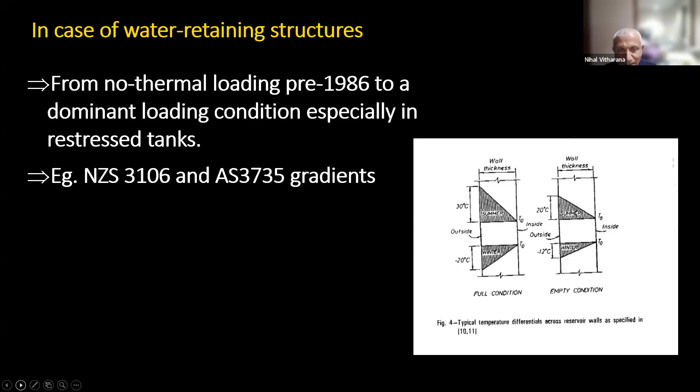Don't think water retaining structures is innovation and guys didn't have anything else to do in their life, so they put these two gradients.

If you look at the bridge, this is a paper I presented somewhere in Japan, in Sapporo in 1995. If you look at a concrete bridge standard, pre-1969 is uniform, so if it's a simply supported multi-span bridge on elastomeric bearings, it will expand and contract, so no bending moment or axial force develops. Now what we got is a fifth order parabola.

If we apply this gradient to the pre-stressed concrete bridge design, this will dominate the live load and the dead loads. That's what it is, becomes very critical. You look at the temperature loads very carefully, this is going to be dominant more than the dead and the live load.

I don't know whether Sri Lankan standards or British have anything, and European standards have this. This is introduced by the New Zealand Ministry of Works. As a graduate, I took measurements on the temperature gradient. Probably I got paid about $1 an hour, which is worse than what a slave would get those days.

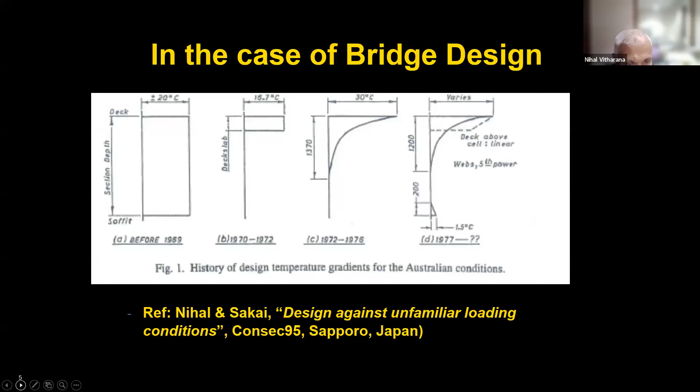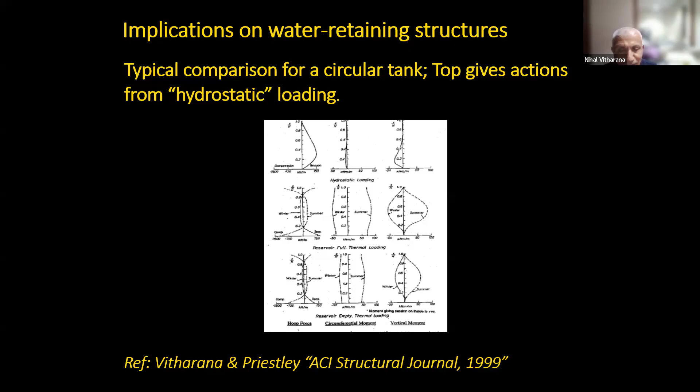This is what most engineers forget or haven't understood, including the professors. Thermal loading is a serviceability loading only. It doesn't apply to ultimate limit states unless there are secondary effects like buckling. It's normally very difficult to buckle a bridge or water tank.

Code implicitly states that too, but there are engineers who apply this to ultimate limit state and end up with reinforcement cages so congested even a bumblebee can't go through. That gives a lot of problems with concrete because you end up with honeycomb concrete. It is because they don't follow these basic principles properly.

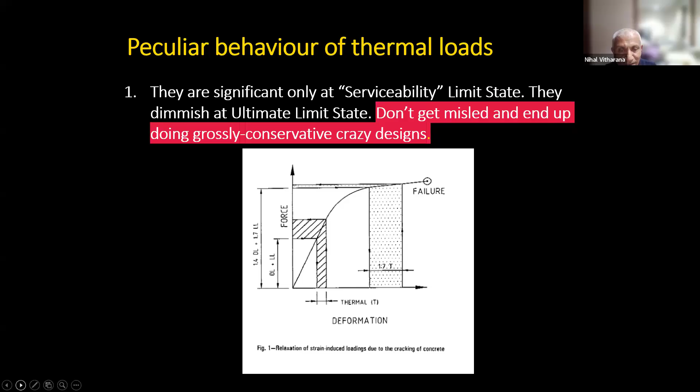As I said, those linear gradients are easy to apply to any design because we break that into uniform, average, and differential, and there are charts available to determine the bending moment and the axial forces. But when the members become thicker, more than 200mm, the temperature gradient is extremely nonlinear, meaning the design effort needed is a little bit more complex.

We had to determine, I will show you later, primary stresses - that is, if the member is unrestrained, what are the stresses developing, because it violates the plane section remain plane hypothesis.

This is typical temperature distribution in a hydrating wall, not solar radiation. We get higher temperature in the middle and lower on the sides because formwork, normally steel, is more conductive than wood formwork. So the bottom two we have broken into primary and secondary stresses. The one on our left, when we look at it, are the primary stress, unrestrained, so we get primary stresses. They are self-equilibrating, and then if it's fully restrained, we get the shape on the right side.

So that's what I said, we had to be very careful when dealing with nonlinear temperature gradients.

I just put this in one of the papers, I can send it, Bandhu can get it. These are simple equations on a beam type member under both external and internal restraints. If RF is external restraint and RM is restraint against bending moment, if we put RM and RF at 0, it gives primary stresses. If we put RM and RF equal to 1, you get the fully restrained conditions.

Once we separate out the primary stresses, linear gradients, there are charts available which designers can use. New Zealand 3106 has charts for circular tanks, and one of my early works got charts for rectangular tanks with sun on any of the four sides. So life is much easier when temperature gradients are linear.

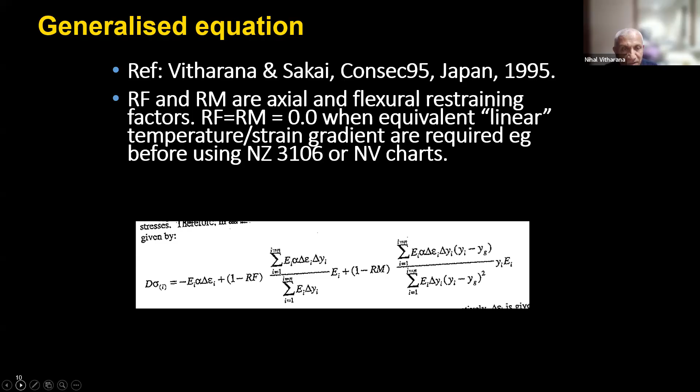Sorry, I had to rush through it, it's a little bit complicated subject, but I'm just trying to give you an insight into what is there.

As I said earlier, this is how a nonlinear temperature distribution on the left has been broken down into uniform, average, differential, and primary. The first two, uniform and differential, are very easy to deal with. There are charts for water retaining design engineers.

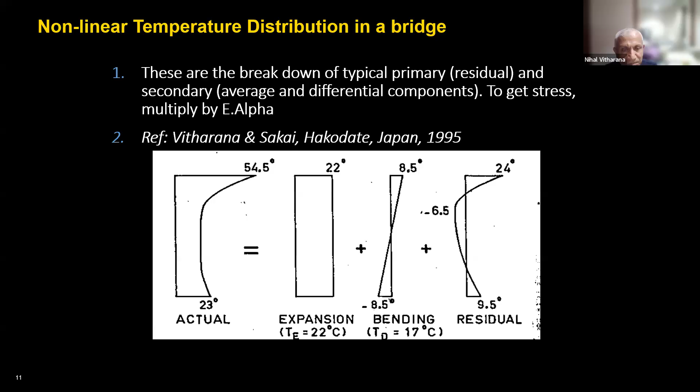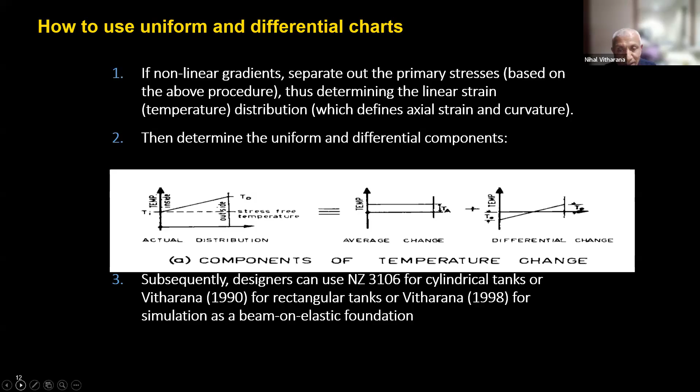So like what you saw earlier on the New Zealand temperature gradients, we got a 0 to 30, so we broke it down to 15 uniform and 15 differential. Those two can be easily used in any of the charts available. Uniform, as I said, if you've got a rectangular tank with uniform temperature drop, you get very high axial forces.

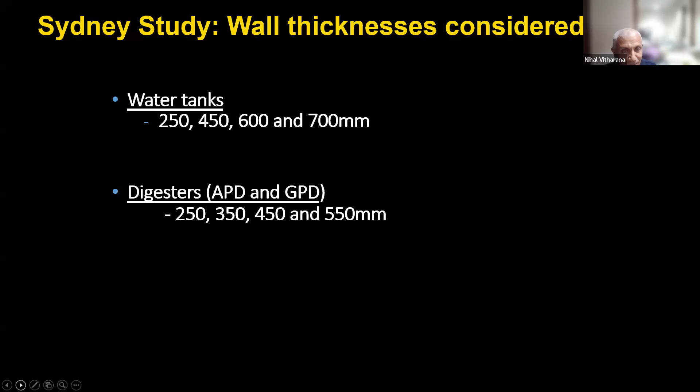As I said, temperature gradients were first introduced by a person called Ackerman in South Africa. He found a lot of tanks crack, and then found out that it is due to temperature changes in South Africa. He published a paper in the Institute of Civil Engineers in 1960.

Then Wood, who was the head of structures at Ministry of Works, New Zealand, measured temperature development in a pre-stressed wall in Wellington, 178 millimeters thick. Those are the measured gradients.

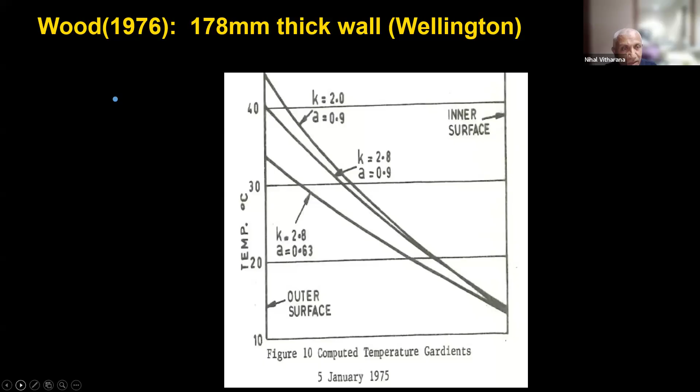New Zealand was lucky because the New Zealand government put a lot of money into research in those days. I was lucky too - I was there from 85 to 1995, all funded by the New Zealand government when it comes to concrete and earthquakes.

Then in 1977, again in New Zealand, late Professor Priestley measured and calculated things on a 200 millimeter thick wall. Nigel was my PhD supervisor at Canterbury. So you can see even with 200 millimeters, there is a nonlinearity.

The code writers didn't want to make engineers run away from the standards when they look at nonlinear gradients and don't know how to design it, so we simplified it by linearizing. But if they apply that to thicker members, design becomes very uneconomical.

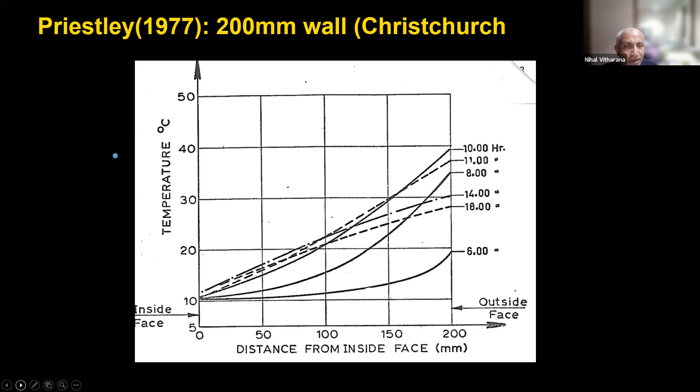As I said, similar thing. I didn't want to make things complicated. When it comes to strain-induced loading, they are deformation dependent, modulus EI - E is Young's modulus, I is the inertia. Similarly, if you take something like an expanding steel bar, if you restrain it, the induced force is proportional to A, the axial area, and E.

So cracking of reinforced concrete relaxes the induced forces - that's what we call the strength stiffness reduction factor, RF, in the standards, and it only goes up to 250. Gradients like those are used cursorily by engineers for just about anything - at 600, they use that and come up with tons of steel, and contractors nearly go bankrupt. Even if they don't go bankrupt, congested steel causes honeycombing, and they probably will go bankrupt again.

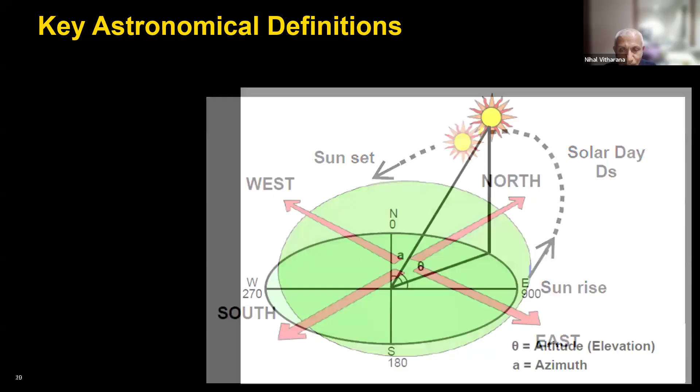This is the definition. The sun is there, and when you project it to a horizontal plane from the northern bearing, you get azimuth, which is A, and elevation is theta. These can be calculated for a given day based on equations. Normally what's called Ds is the solar day, which is the time difference between sunset and sunrise. Each hour, the sun moves by 15 degrees - that's how it works. So if you know the solar day, you can calculate the solar angle by dividing by 15.

Yeah, next one, please.

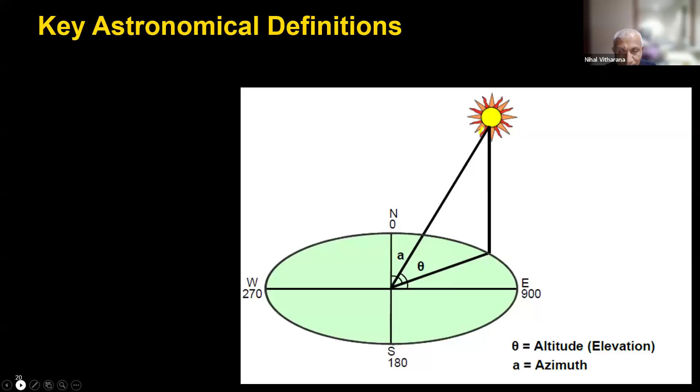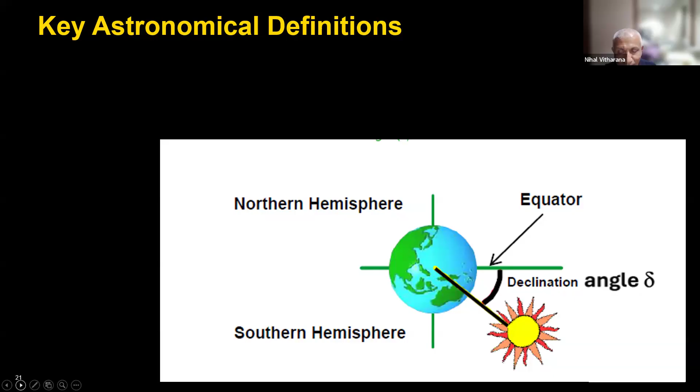This is basically what happens, why we get summer and winter - for some reason, don't ask me why, the Earth doesn't rotate in line with the center line between the sun and the Earth. It has an angle called declination, and it changes throughout the year. So as the Earth orbits around the sun, it is at a varying, awkward declination angle, which can be determined given the day - there's a formula for that. As I said, total global solar radiation Q, normally in megajoules per meter squared, is the key parameter needed to run this model.

It's called cumulative, and I'll show you there's a formula to calculate it on an hourly basis. So it's on a horizontal surface, but if we hold a paper perpendicular to sun rays, that's called direct beam radiation. On a vertical surface, solar radiation is much different from horizontal, because the vertical itself is at an angle. So direct beam has two resolutions: first we go from the horizontal beam to the vertical direct beam, and then convert it back to the bearing of the wall.

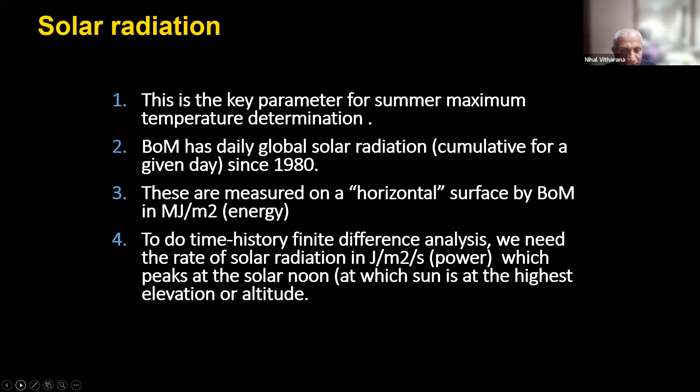Now we don't have any problem - I can just hit the button and get any previous day's total global solar radiation. That's the equation; it gives joules per meter squared per second on a horizontal surface. Q is the total global radiation in a day, and DS is the solar day. You can calculate that mathematically from formulas. Yeah, next one, please.

Now, again, a little bit of astronomy. When we get solar radiation on a horizontal surface, it has two components. One is direct beam, and when the sun emits its energy and it enters Earth's atmosphere, it also gets scattered, known as diffuse. It's like having lights over half of the Earth, the hemisphere, and all that hemisphere puts solar radiation on the horizontal point. But on a wall, we only get half of that, because it's a quarter of the Earth. So we first determine the radiation intensity on horizontal, then determine what's the direct component and what is the diffuse or scattered component.

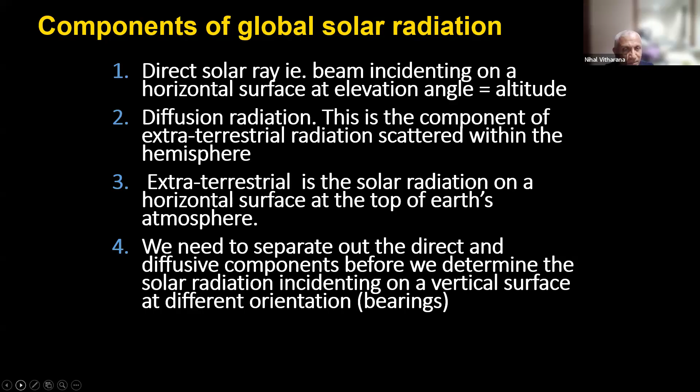And again, it is going to solar energy. I think some Australian scientists who work at CSIRO developed a methodology to separate those things out mathematically. Spencer is an Australian scientist at CSIRO who used his method and then compared it with another person's method. You can't get 100% accuracy, but the solar energy estimate science has the least precision, so you should not try to get the number to the third decimal place.

One other thing with the vertical wall is we get reflection back from the surrounding. If it's a clear surrounding with a lot of white buildings, in New Zealand, when they measured at Christchurch airport on vertical panels, they found 40% coming back from the nearby surrounding structures. So what you measured on a horizontal surface can go up by about 40% on a vertical wall because of the reflection back from the surrounding.

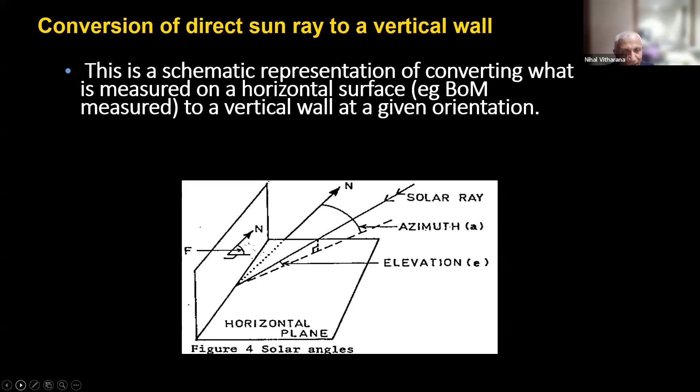This is about how you handle a vertical wall at an angle to the north, with the sun azimuth and the altitude. It's not complicated mathematics, but you just need to resolve the direct beam and diffusion at different angles.

In a simplified case, that's the equation given for one on a vertical wall, once we know the value on the horizontal surface, IHT, because it has the bearings and the azimuth involved.

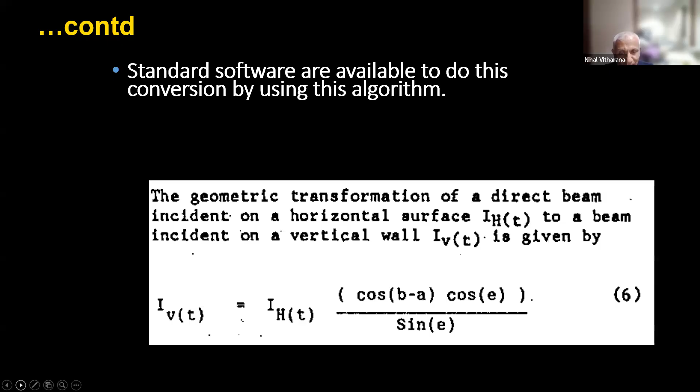I'm just giving insight so that you know what's involved - this is all part of that method. Then I applied it for the maximum daily value. We had data on the daily total since 1980, so it's nearly 45 years of data. Out of that, on the 3rd of January 2000, we had the highest solar radiation recorded in Sydney - 35 megajoules per meter squared, the maximum ever recorded since 1980.

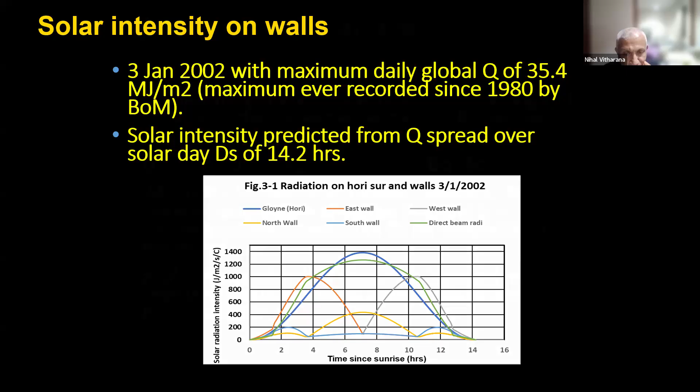One other input parameter we need is ambient temperature. Now this is tricky - I don't know what is reported in Sri Lanka by the Department of Meteorology. Here, they give Tmax, the maximum ambient temperature in a given day, and the T minimum. So for the hourly variation, we had to develop a curve. There are a few models, and that's what I have done here. We get Tmax and Tmin given in the standards, and then convert them to hourly values, because we need ambient temperature for the convection calculation.

If ambient temperature is lower than the surface temperature of the concrete, heat will be lost to the surrounding due to convection. If it's a windy day, more heat will be lost. So that's what we need - that Ta,t value in that equation.

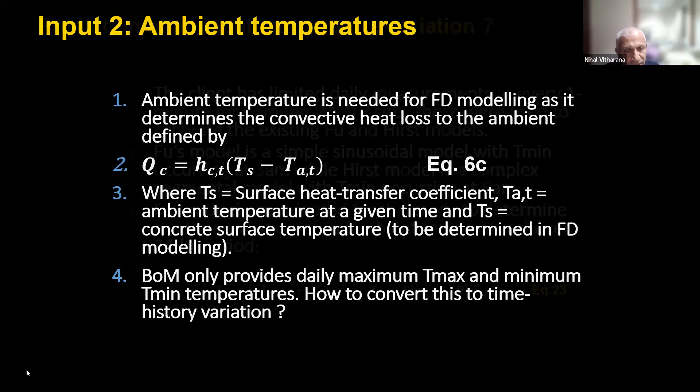There are two models normally used by engineers for bridge temperature calculations. Fu is, I think, from Hong Kong. Hirst is a professor who used to work at Adelaide University in South Australia. They both give very similar curves, but Fu's one is better because it's a simple formula - only two parameters needed, Tmax and Tmin. The assumption made is that the minimum mean lowest temperature occurs at 3 a.m. and the highest at 3 p.m., with a sudden drop of 2 degrees at sunset.

This is a comparison with measured ambient temperature from 4th January 2020, where the measured temperature was 45 degrees. The T minimum on that day was quite unusual, minus 3.3. The maximum was measured on 4th of January 2020 at 45 degrees, and the winter T minimum occurred on the 16th of July 2018. You can see the two models versus measured values are reasonably good, though not perfectly accurate - you can't get full accuracy on these because, as I said, this is not a precise science.

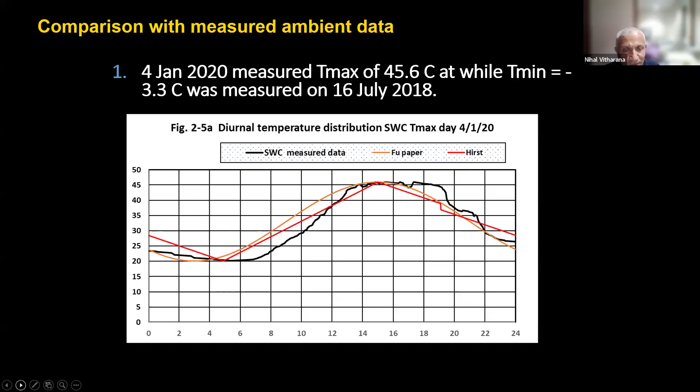Now the other thing we need to do is determine the inside temperature of the water or the sludge. It's very difficult to do mathematical predictions because operational water comes and goes depending on demand. Similar with sludge, it's exposed to atmosphere before being fed into the digester, then after phase 1 digester it goes to phase 2. So the best thing is to have some sort of calibration of inside temperature with a parameter.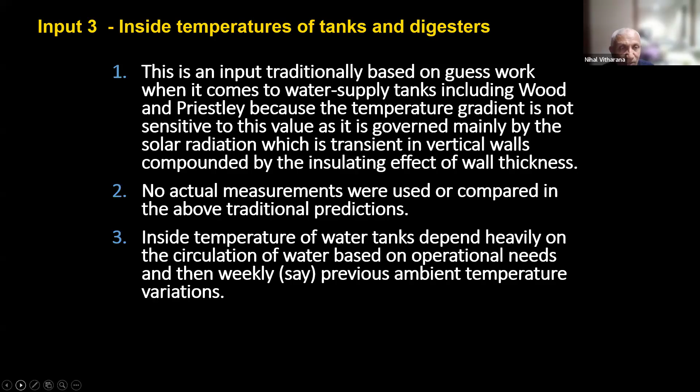Best parameter is the ambient, because water is coming from a dam or pipeline. Previously, like in New Zealand, they assumed inside temperature is always equal to the 6 a.m. temperature of that day. It doesn't show to be correct when we look at the data from the client's portfolio, but again it doesn't make much difference. So what I've tried is calibrating with the average temperature of the previous 6 days as the initial temperature for the tank.

Next one, please. Again, this is a correlation between the inside temperature and the mathematical formulation we regress from the measured data.

Wind speed, as I said, is very important because we lose heat due to convection. At zero wind speed, the heat transfer coefficient HC is about 10, but it's very sensitive and can go up to about 80. So if it's windy, our temperature would be much lower because we lose heat from the wall to the surroundings.

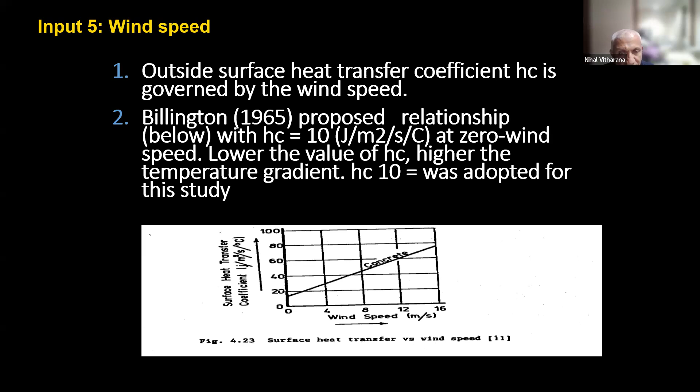Thermal properties: thermal conductivity of saturated concrete is about 1.4 joules per meter per second per degree C, but it can increase to about 2.2 for hydrating cement like wet concrete. The specific heat doesn't change much, it varies from 900 to 1000.

The surface absorptivity factor is very important. On a black surface, like concrete, it's 0.9. So if S is the incident solar radiation from the sun, 90% will be absorbed. Whereas a white surface absorbs only 35%, the other 65% is reflected back to the surroundings.

Finite difference model: so we got inside temperature, solar radiation, ambient, then we can do a finite difference. I am prejudiced towards finite difference, but there are finite element models as well.

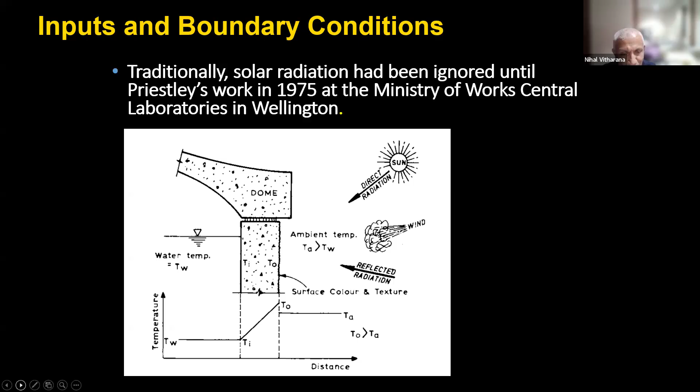As I said, you saw this diagram earlier, so we are going to mathematically model it. So for the system, on our right we got all the incident solar radiation, things go out as QC, and the water remains at almost constant temperature.

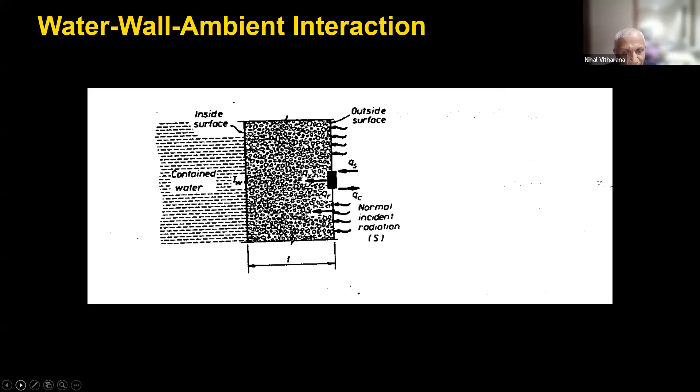This is the second law of heat transfer, similar for groundwater, similar for diffusion of moisture. We need to mathematically model it, in my case using finite differences. On your right we got density and specific heat C. If specific heat C is 0, because to raise the temperature of material we don't need much heat, that curve becomes linear.

So when it becomes linear, it's known as steady state. That's what they sometimes only teach students, steady state. So if you go T1 to external T2, they draw it with a line. But it's not the case when you go to unsteady state.

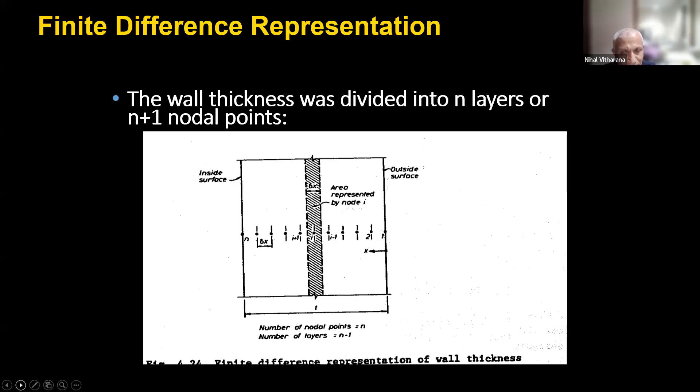So this is a finite difference discretization, n plus 1 nodal points and n layers. I'm just going through this one very quickly. These show how you do mathematical balance in a finite difference, and some of the papers I wrote in 1990 got this formula.

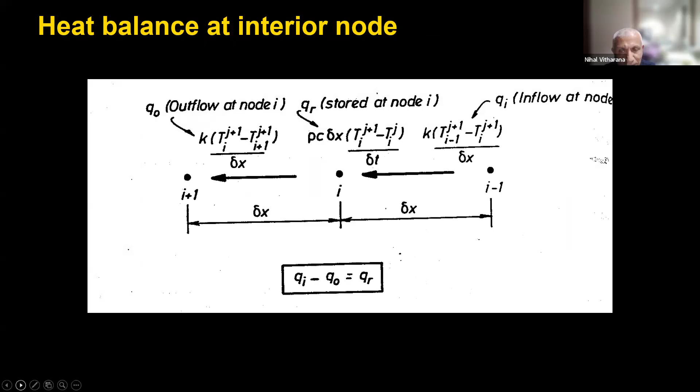So for this interior node, that's the equation, how it looks like. And for the external surface, this is how it looks like.

There are two methods in finite difference. One is implicit, which is moving forward, so we have to have an n by n matrix to be solved. But there's explicit, which is backward substitution, so you can do it on a spreadsheet or by hand calcs without any iterations, but you have to select a small time step, otherwise it becomes numerically unstable.

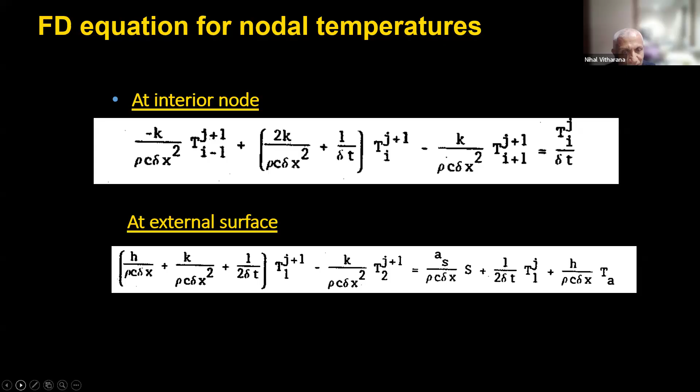I use implicit because I have a program written a while ago, but if I'm lazy I do it on an Excel spreadsheet using the explicit scheme. I write those formulas for external and internal nodes, and I get this matrix. I use a direct inversion method, but some people don't like stalling the computer. Nowadays computers are so powerful, a 50 by 50 matrix is solved in probably less than half a second.

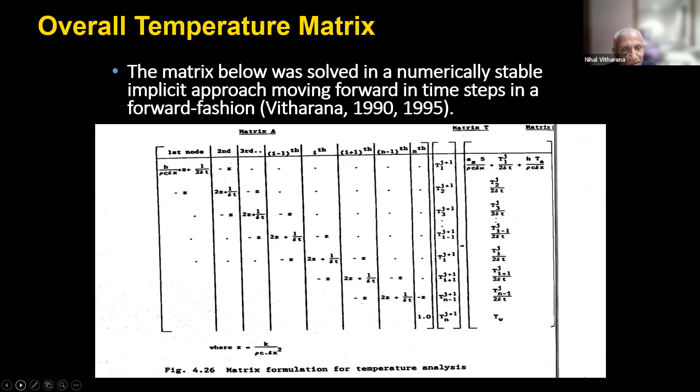This model we calibrated using real prototype concrete slabs, heated from one side with a circulating water cooling jacket on the other side, and tested for bending moments and axial forces. These were published by myself and Nigel Priestley in 1998 and 1999 in the American Concrete Institute Structural Journal.

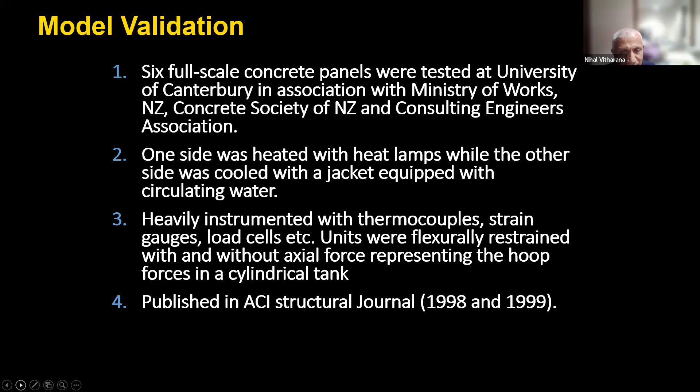So this is a schematic representation of the cooling jacket. You've got heat lamps, infrared, on one side and the cooling jacket on the other. When we measure temperature gradients as well as restraint forces, we need to restrain them to calculate the bending moment and axial forces they induce.

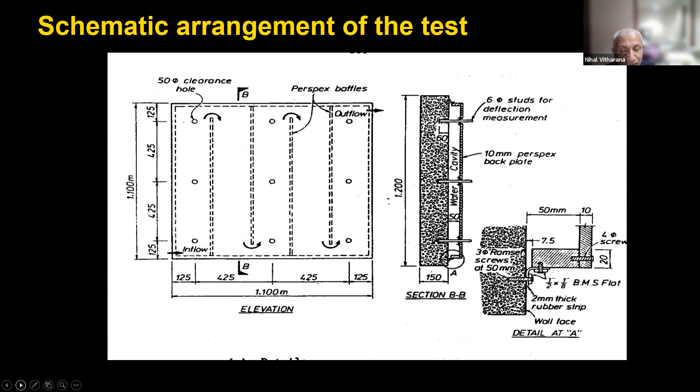These instrumented slabs were at the University of Canterbury. I and the technician did all the manufacturing, day and night.

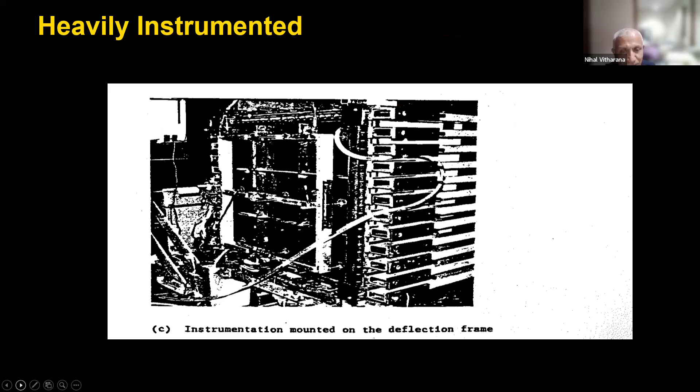This is measured as well as finite difference program data. See how it's reasonable matching. But if we massage the numbers, we can get 100% accuracy, but that's not the purpose.

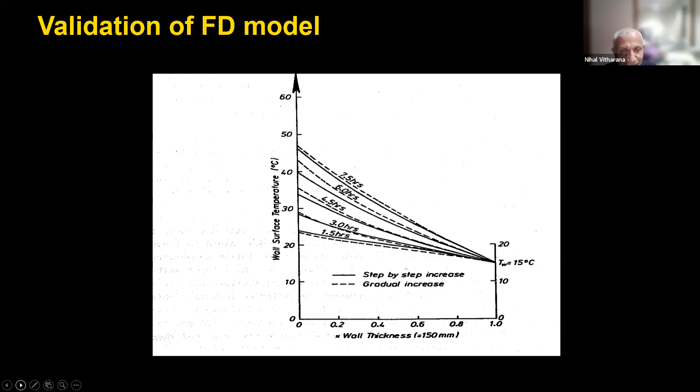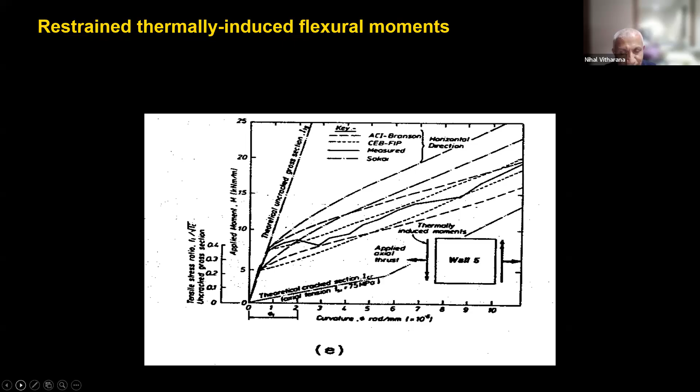Now, all this is good. So for Sydney, we did a lot of calculations over a few days and various tanks, various conditions to come up with nonlinear gradients. I will present those ones very quickly.

So 3 scenarios were considered: the day with maximum recorded global radiation Q, maximum ambient temperature day, and minimum ambient temperature day, for 45 years of records. We didn't want to do probability, we just want to get the maximum and make sure the things are a little bit conservative.

So summary of the finite difference analysis: critical maximum and minimum temperature gradients.

Water tank and acid phase digester 2 have similar temperature gradients. Acid phase digester 1 is the first one, it's the stabilized thing, so temperatures are not as close to the ambient, exposed previously. So we're only giving the water tank ones.

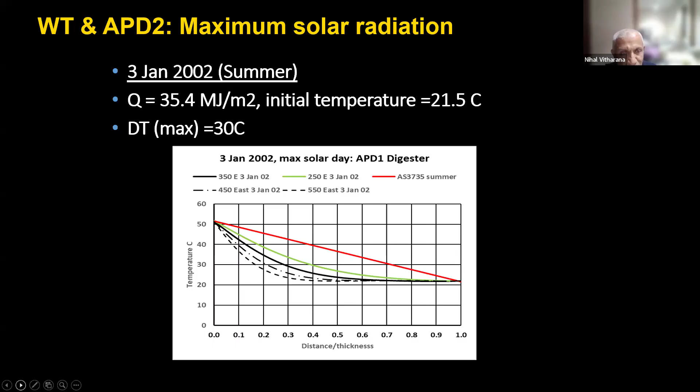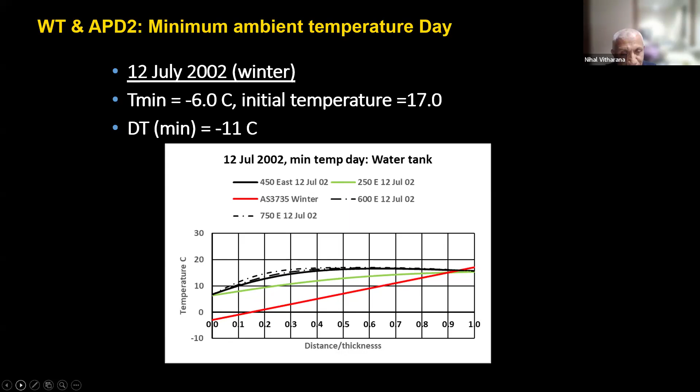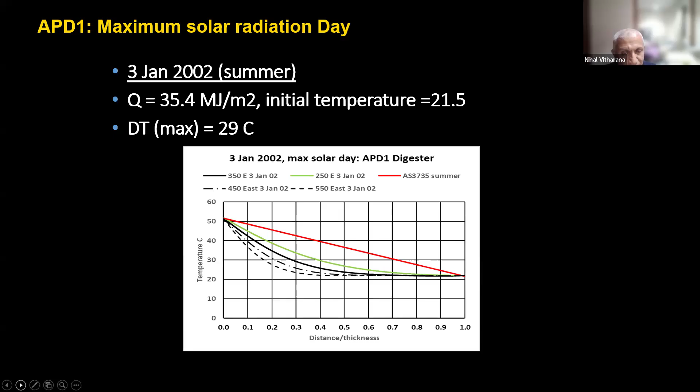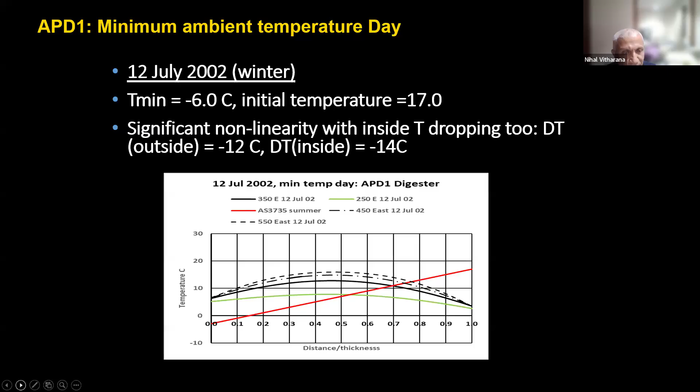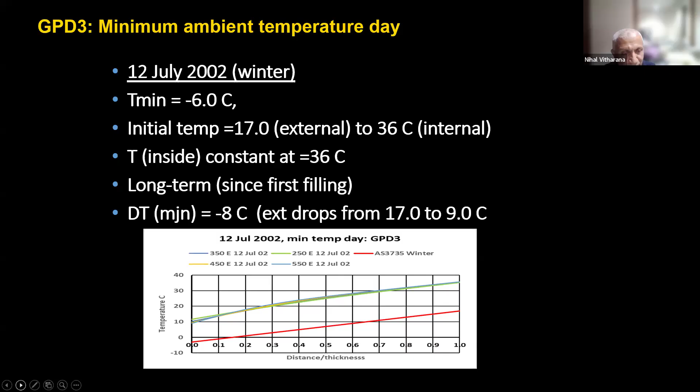So the maximum ambient temperature is a similar day. This is a winter case: again, a different curve, inside remains at 36, while the outside drops to, I think that day outside temperature is -4.

-6 that day. So I just want to say east facing versus west: in the morning east facing won't get the solar radiation, but the ambient temperature is lower early in the morning. When it goes to the west, probably the same solar radiation, but we get higher ambient because it has heated up. But still the difference is about 4 degrees, sometimes not worth worrying about when we know all the uncertainties involved.

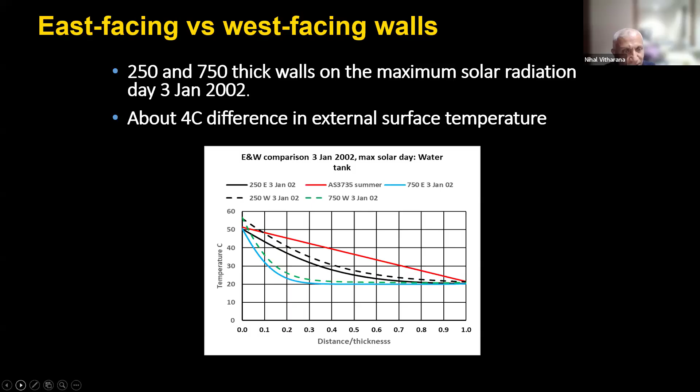All that is good, but every engineer can't sit and... sorry, there was some crash, give me one, please. Okay, you may have to reboot. Be on time.

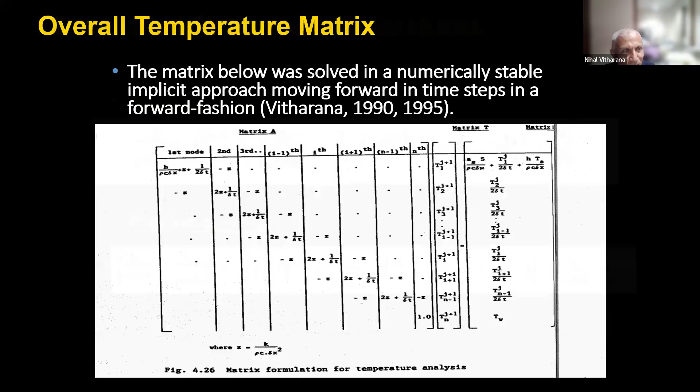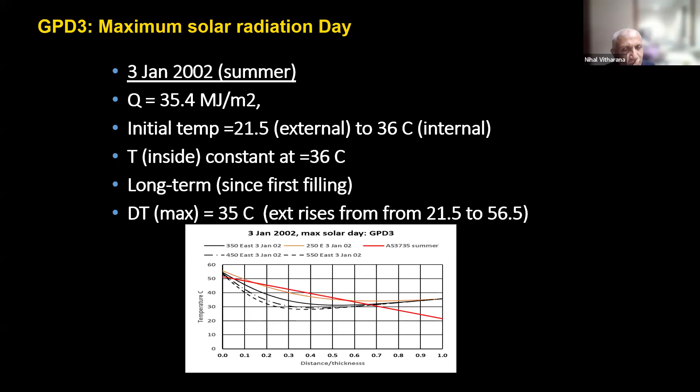As I said, not every engineer can do finite difference. I get young guys who can't differentiate sine theta, looking at my face, wondering how to do it, needing to go find Google.

So for that reason, we try to develop a nonlinear model, at least for the summer, because it's very difficult otherwise - it's position dependent, day dependent, operational dependent. But at least for summer, which is the critical one for tank design, this gives a nonlinear gradient which covers all the wall thicknesses. With that, the tendency would be design won't be that conservative, but it is almost similar to linear when it is about 175 millimeters, but it becomes nonlinear for higher thicknesses. So with higher thicknesses, it will provide economy in the design as opposed to just cursorily using AS3735 linear gradients.

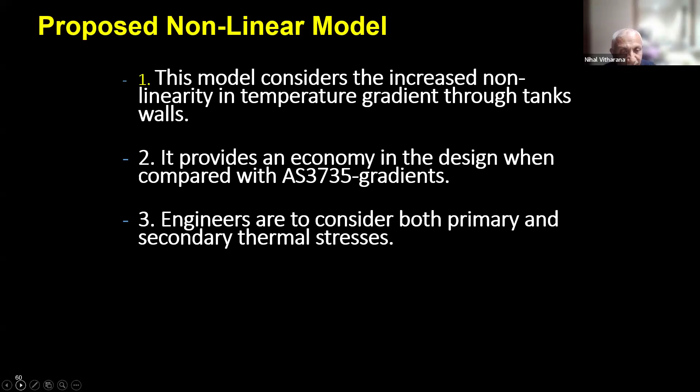You copied it correctly? Yeah.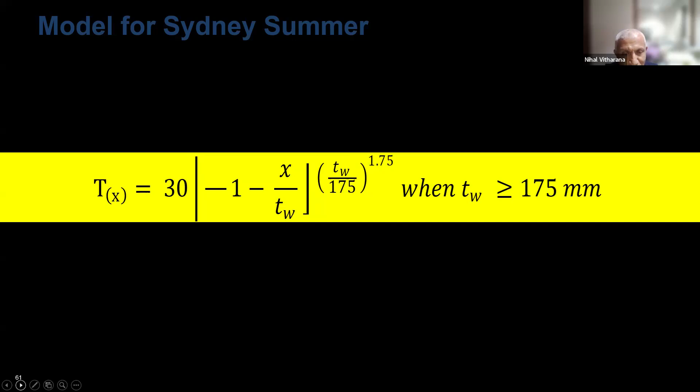I tested it extensively. I spent about 1 week just playing around with the model. Okay, let's go to the next one.

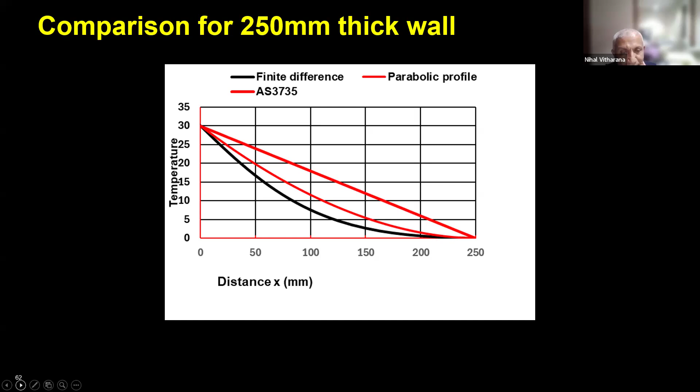So this is a 250 millimeter wall. The linear one is New Zealand standard, 30 degrees. The dark blue one is the finite difference, which I mentioned earlier. Then the orange one is a parabolic profile, close to the finite difference. Again, they tend to be linear. So if I put 175, all those three curves become linear, similar to the New Zealand standard one.

You can see just looking at the diagrams how conservative it would have been if engineers, without knowing the limitation of that gradient, applied it only meant for thinner members to everything. You end up with a crazy design. As I said, sometimes vibrators can't go through, and contractors say, oh, we have never seen that much reinforcement in some of the designs in the past.

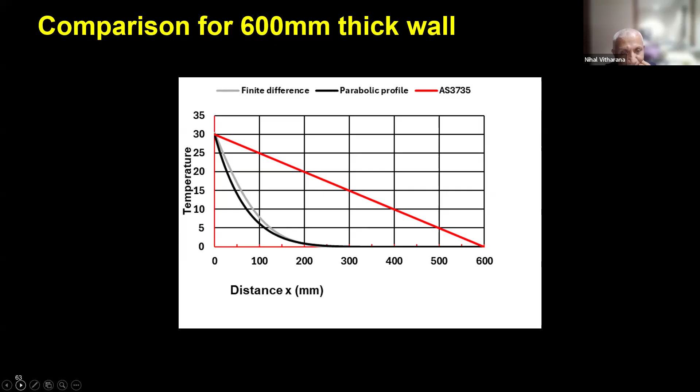Next one. I think that's the end.

Yeah, so these are the findings. Inside temperature of water tanks and digesters were correlated in our study, but it's very important to get that in order, because you can't mathematically model it, since the water and sludge comes in and goes out. It's an operational thing. With solar radiation in summer, significant temperature nonlinearity exists.

This highlights the conservatism in using New Zealand 3106 gradients for thicker walls, say greater than 200 millimeters. GPD3, the gas phase digester, it's not a water tank. All the people apply the same temperature gradient, but it's got a very unusual operational requirement, 36 degrees maintained artificially throughout the day. And if not careful during the first heating, it will have a thermal shock.

I was involved in a pulp and paper tank where they put 70-degree hot water into the tank and it cracked as people were watching it. It's a thermal shock, so I had to be careful. Next one.

End? Yes, that's all. Yeah, that's it.

So it's a long journey, but I just want to give you insight. It won't make you a design engineer, but at least give an appreciation of what other standards around the world are doing, and they make much more sense rather than using European norm, EN 1990, probably used in Sri Lanka. It gives deemed-to-satisfy criteria like minimum extra steel or whatever it is, and they don't make sense.